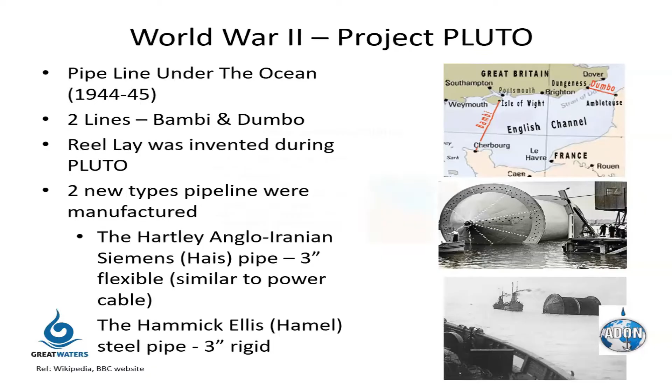With time and development of new technology by industry leaders such as McDermott, Saipem, Technip, Subsea7, Allseas, etc., offshore pipelines moved from shallow water deeper and deeper into the ocean. And presently, we are almost at 10,000 feet water depth.

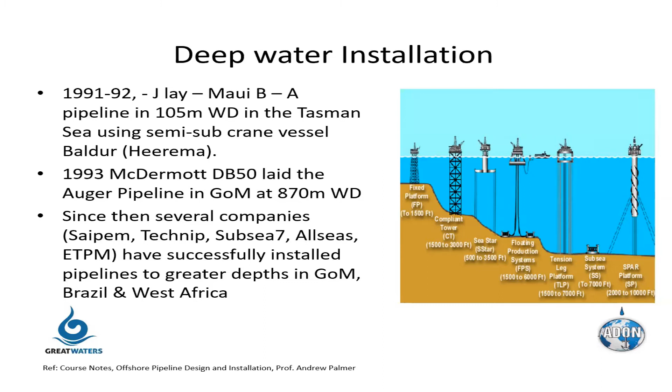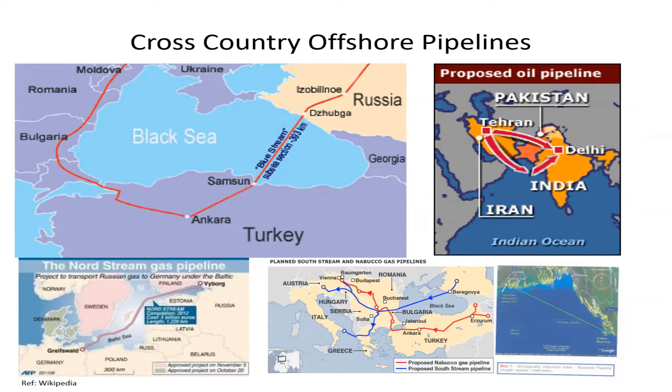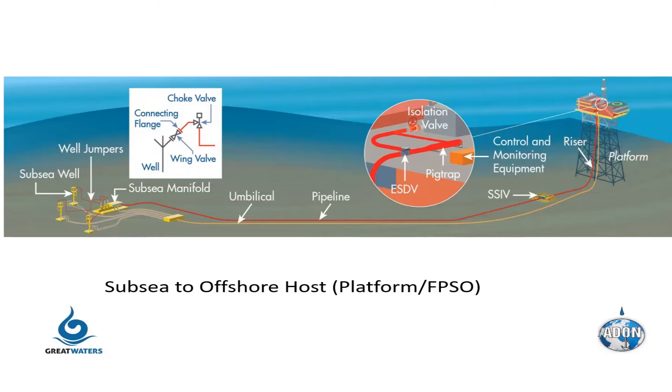Based on the safety philosophy, pipelines are normally controlled by subsea isolation valves, which can isolate pipeline and a fixed or floating system in case of any incident. This image represents how we transport hydrocarbon from offshore host, a fixed platform or a floating structure, to onshore facilities, maybe a refinery or any other facility to store hydrocarbon.

From offshore hosts, hydrocarbon is transported to onshore facility by pipeline system that comes from deeper water to a landfall point and then continues onshore. Offshore and onshore parts are isolated by isolation valves at offshore end as well as at onshore end.

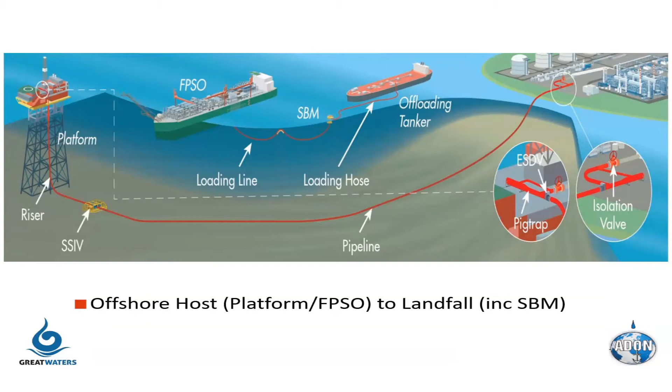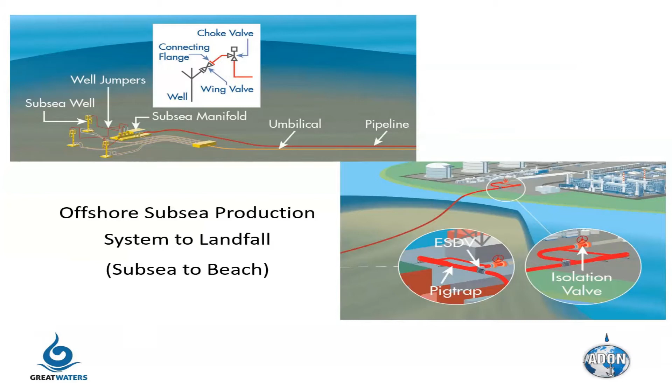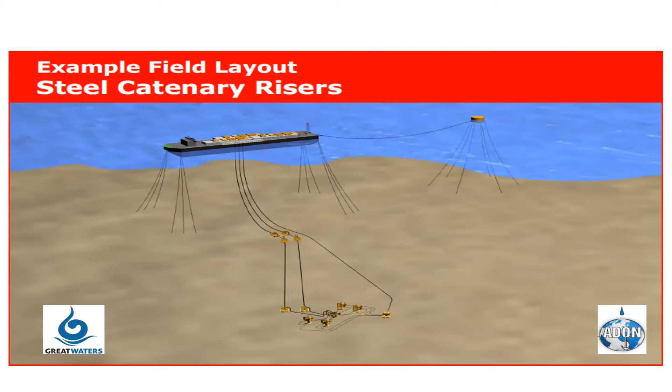This image illustrates FPSO and SCRs. In deeper water, we do not install a separate fixed riser. Instead, the pipeline end is simply lifted and connected to the FPSO, and the long span of pipeline behaves as a catenary. Shell had developed this technology in the Gulf of Mexico and has also used this in West African deepwater fields.

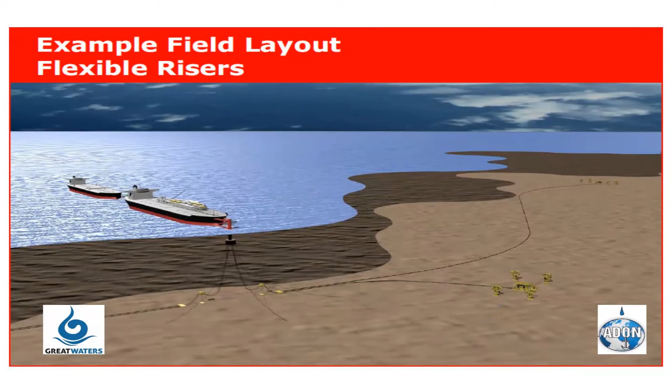Now let's talk about pipelines, design and construction philosophies. Let's first try to understand why we need a pipeline. Any pipeline operator needs to transport hydrocarbon from point A to point B. We need to do it safely. We need reliability and availability of the system with reduced or no downtime. We need sustainability for its design life of 25 to 30 years, whatever it is.

And of course, we need cost optimization. A pipeline system ideally should be much cheaper than transporting oil and gas by tankers. The system design philosophy involves HSE risks as well as asset and business risks.

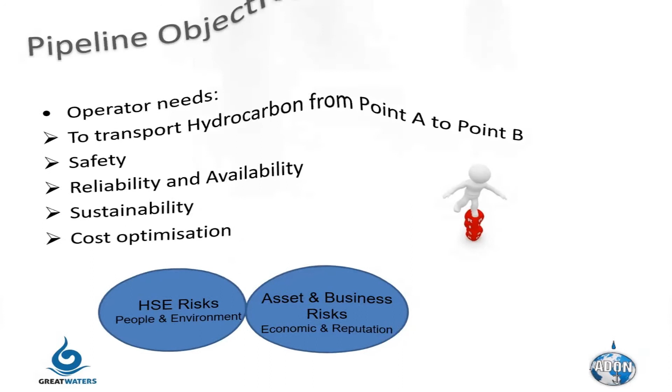Let's now try to understand the phases in the life cycle, which we normally call cradle to grave. Life cycle starts with the feasibility and concept phase of a project. Once the technological concept and commercial feasibility is established, a project moves to select and execute phase: engineering, fabrication, transportation, installation, and pre-commissioning. Operate phase starts from commissioning and runs through the design life of the system.

These days, reassessment and life extension is quite largely in practice, as marginal fields nearby often try to use existing infrastructure to reduce capex, by using a nearby platform and existing export pipelines. For this structural integrity assessment of pipeline infrastructure towards the end of design life, effects of corrosion and the cathodic protection system are inspected and examined to allow operation of the pipeline system beyond its original design life and for some new service conditions.

Once the pipeline is no more needed, it is decommissioned by removing the pipeline from the sea or by abandoning by trenching and burial of the pipeline after making it hydrocarbon free.

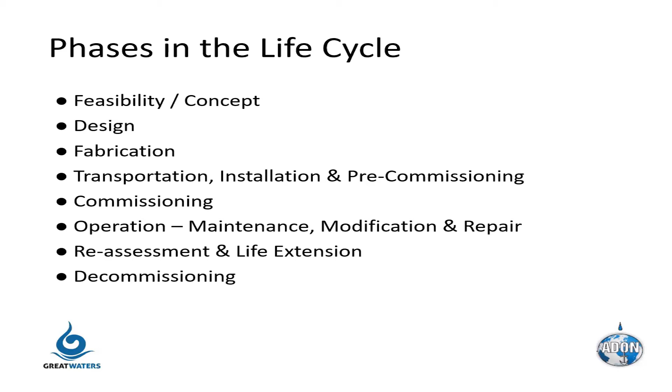Pipeline design uses two different philosophies: working stress design method and limit state design method. In the working stress design method, SMYS is multiplied by a factor of safety, which is less than 1, to define allowable stresses in the system. Factor of safety differs from code to code. We have BS codes, ISO, ASME, Dutch code, Canadian code, Australian code, and the most popular DNV standard.

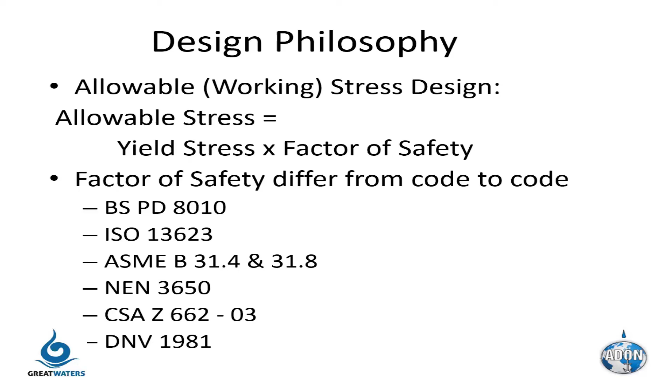Limit state design method was brought into the pipeline industry by DNV in 1996, which was later changed to DNV OS-F101, popularly known as DNV 2000 standard. API RP 1111 also provides limit state guidelines. This is based on risk and reliability, safety class and partial safety factors. This method is also known as LRFD, load and resistance factor design, where load and resistance are compared using partial safety factors.

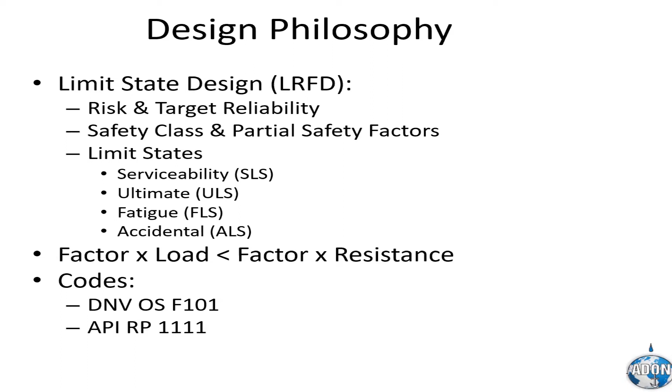I'm sure all of you are familiar with the left side picture of consequence and likelihood, green, yellow, and red color codes. In summary, we need to keep the snake inside a box, like in the second picture. We cannot change the consequence if things go wrong. But by good engineering practice, we can always try to reduce the likelihood of the snake coming out of the box, which in a way we can say is the probability of the event happening.

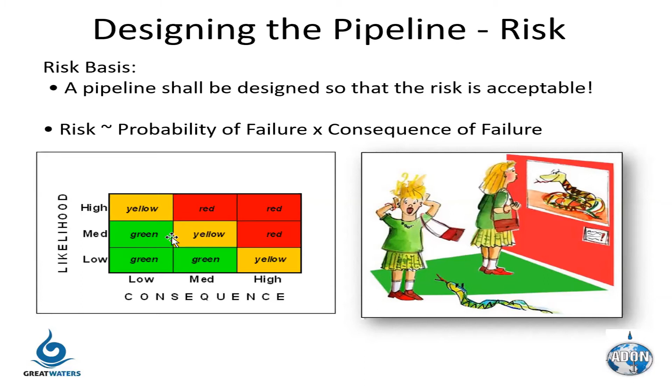This is something I believe is very familiar in our lives. I personally used to be confused with these terms till I worked for Lloyd's Register. In terms of pipeline projects, the Class Society does verification of initial stages of the project, like design or installation. For a certification project, line pipe production at steel mills, design, welding, and installation and pre-commissioning are witnessed and reviewed by the Class Society.

Operational integrity assessment and life extension are also done by the Class Society. Certain components of the pipeline system, for example, flexible pipelines, different types of valves or connectors, are also given type approval by the Class Society.

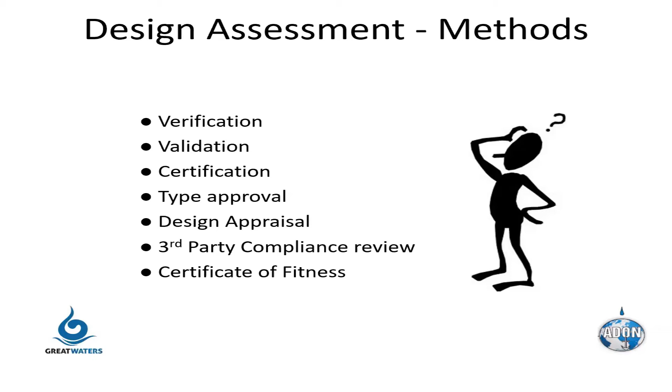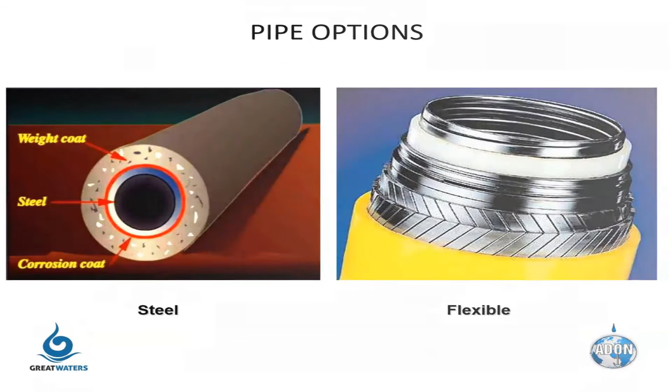We normally have two types of pipes: rigid carbon steel pipes with anti-corrosion coating of FBE or polypropylene or polyethylene, and concrete coating to provide on-bottom stability. And we also have flexible pipes, which are normally used for deep-water riser systems. We also use pipe-in-pipe systems where a bunch of smaller diameter pipes can be bundled into one large casing pipe, or for certain cases where insulation is required to transport gas and we cannot allow temperature drop, to avoid wax formation.

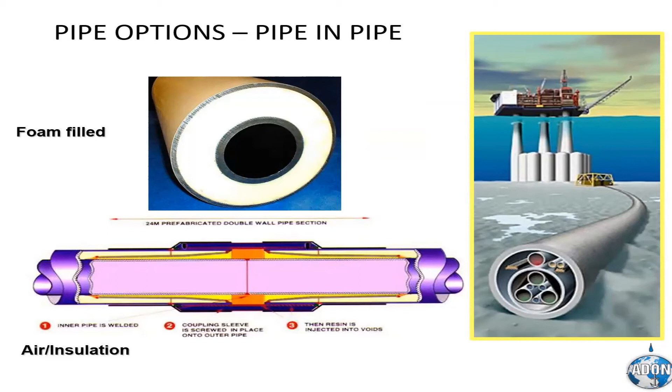A key design aspect of pipeline is presented in the following slides. PD by 2T, hoop stress. That's the only formula I have put in this entire presentation. First step of pipeline design is hoop stress, hydrocarbon containment. Then we check hydrostatic collapse, very critical for deep water pipelines during installation: empty pipeline with no pressure inside and external hydrostatic pressure.

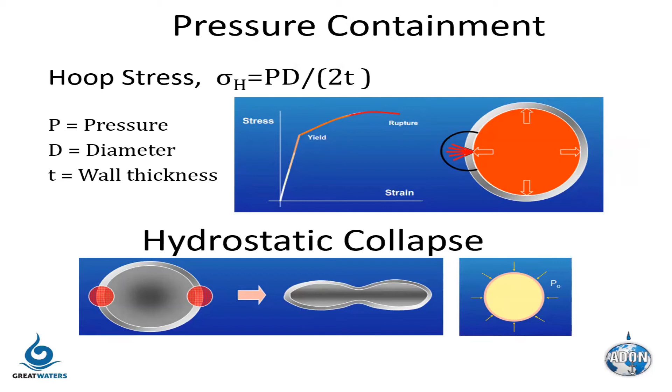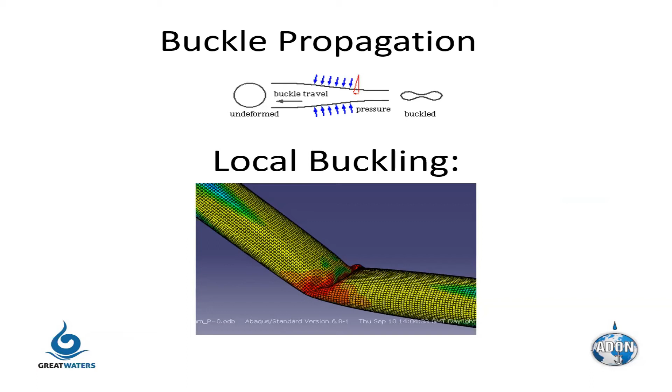Stability. This is a very familiar term to naval architects. Our case in pipeline engineering is to make the pipe stable on the seabed against hydrodynamic forces by increasing the weight of the pipeline and thus increasing frictional resistance. Concrete coating provides weight and reduces buoyancy and thus makes the pipe vertically stable and laterally stable.

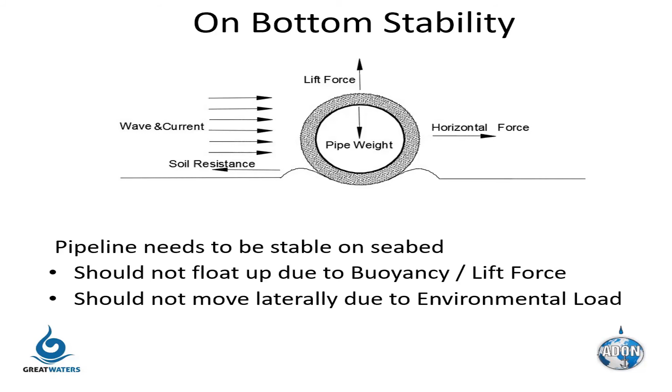Span analysis is a very critical aspect of pipeline design. Spans occur due to uneven seabed, scouring for an operational pipeline, and also local imperfection, as we can see in the last picture.

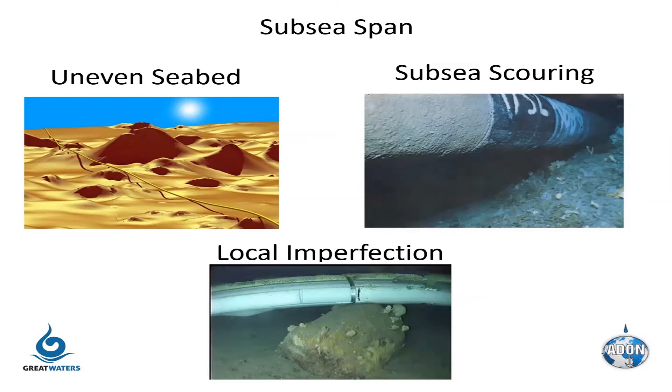The DNV guideline provides a detailed analysis method for such spans, where fatigue limit state is assessed for vortex-induced vibration and direct wave loads, and ultimate limit state is assessed for static bending, VIV, wave loads, pressure effects, axial forces, and also, for certain cases, trawl gear interference from fishing boats.

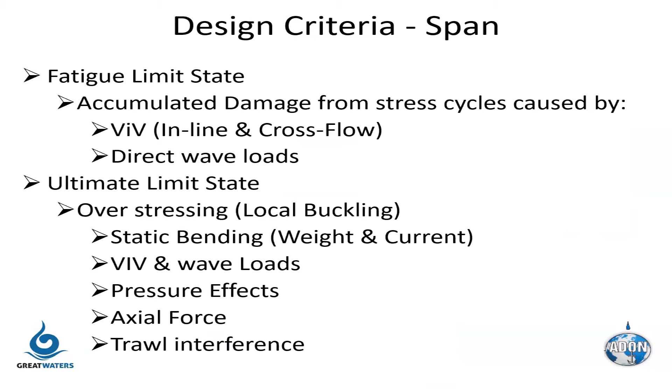Thermal expansion and upheaval buckling are critical phenomena for a pipeline design. A heated pipeline wants to expand and soil resistance provides an opposite direction force. Therefore, for a pipeline up to a certain length, these two forces keep the pipeline in equilibrium. We call this a restraint zone, with virtual anchors at both ends of the restraint zone. Beyond that, at both ends, the pipeline expands, and an end expansion spool, L or Z shaped, is designed to mitigate the effect. In the restraint zone, the pipeline has a huge amount of force in the wall.

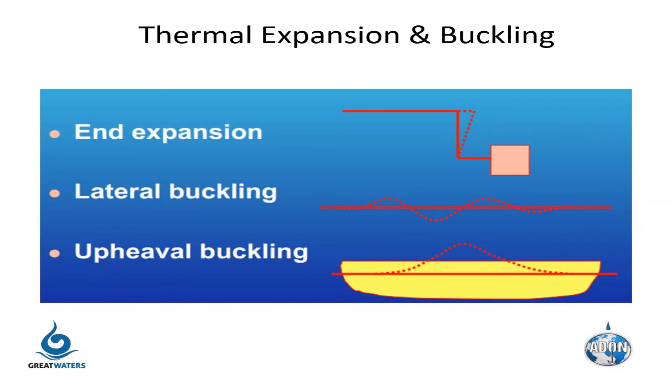Therefore, due to any imperfection or out of straightness, the pipeline may buckle. A buried pipeline may buckle vertically and come out of the burial, while a pipeline on the seabed can laterally buckle and move sideways. Rock dumping is a popular method to mitigate lateral or upheaval buckling.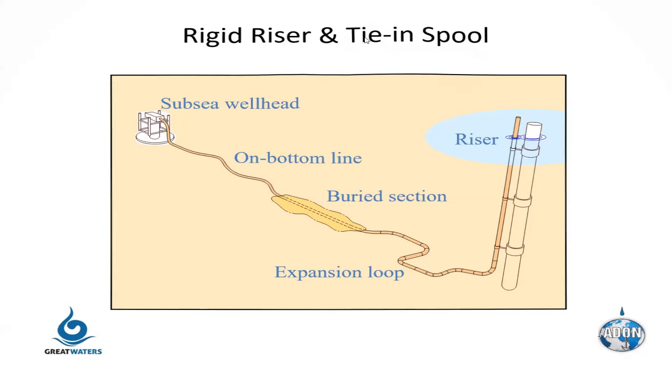Risers are designed against yielding, buckling, and fatigue failure. Loads include weight loads, which are riser material, coatings, anodes, flanges, transported fluids, marine growth, buoyancy. Pressure loads include internal design pressure. Thermal loads include design temperature, expansion load, and environmental loads include hydrodynamic loads, wind loads, ice load, and seismic load.

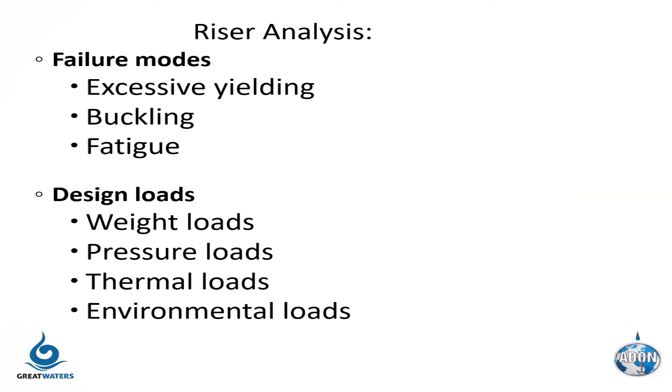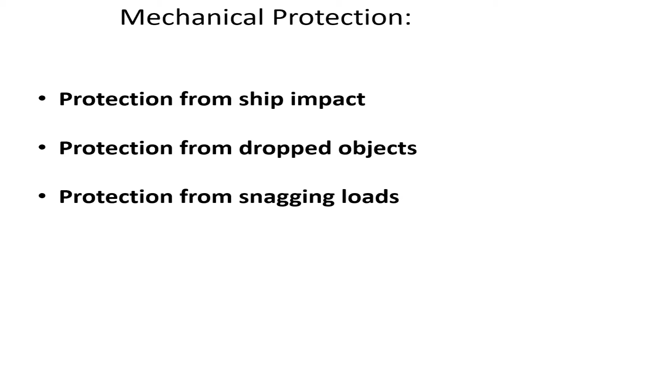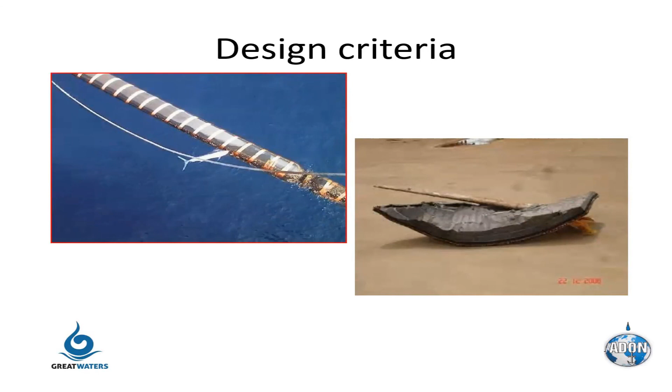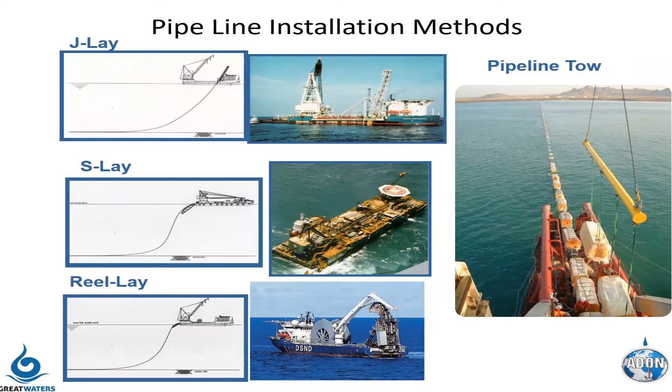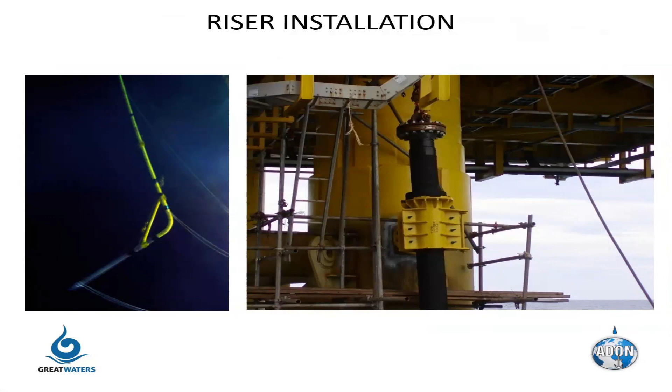Risers are installed by the stalk-on method and secured by riser clamps connected to the jacket legs. In some cases, the jacket comes with pre-installed risers.

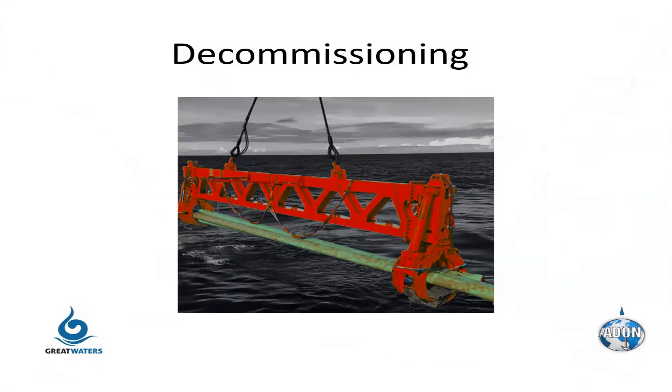We are almost at the end of the presentation and we'll talk about decommissioning now. Firstly, the pipeline needs to be made hydrocarbon free. For buried pipelines, minor corrective measures are required so that the pipelines are not exposed in the long term. For pipelines on the seabed, major corrective measures are required to trench and bury the pipeline. In case leaving the pipeline under the seabed is not feasible, pipelines have to be cut in small pieces and removed, or the reverse process of pipe lay can be performed and the pipeline can be recovered to a lay barge, cut into small pieces and taken back to shore for reuse or scrapping.

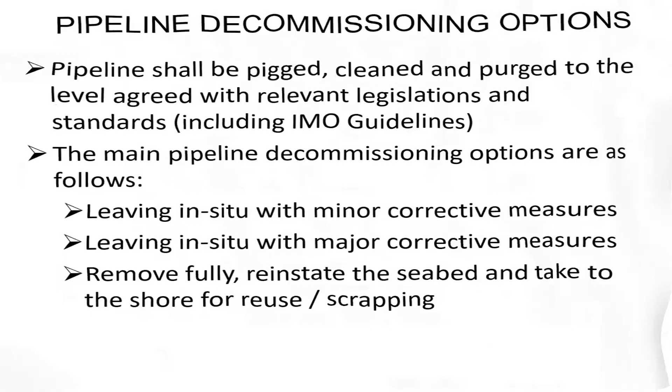Till COVID-19 and low oil prices changed the offshore project world, the industry was going deeper and deeper. High pressure, high temperature field development and Arctic exploration were on the cards. The feasibility of these is questionable at this moment. Also, the world is moving towards greener energy. More and more offshore wind, offshore solar, and offshore hydrogen projects are coming up on the horizon. So the future looks very interesting.